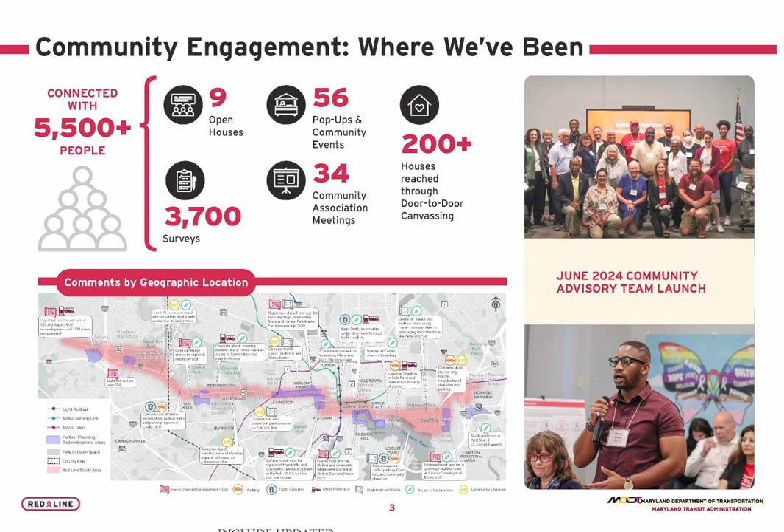The update will revisit and revise the strategies for strengthening communities, supporting economic empowerment, fostering a healthy environment, and managing construction impacts. In addition to updating the Community Compact, the Red Line team will continue using multiple ways to reach communities along the Red Line corridor. Pop-up events will be used to meet people where they are in their daily travels.

Community events, fairs, and festivals will be a way to reach large groups of people from the broader community. Community association meetings will be valuable ways to answer community-specific questions. Online resources like the website, project electronic newsletter, and social media will continue to provide up-to-date and on-demand information and a place to find background resources and materials.

To reach Spanish-speaking community members, engagement activities will continue to be supported by Spanish-speaking team members, multilingual website options, and translated project materials. Light rail transit recommended for the Baltimore Red Line. A key step in moving the Red Line project forward was Governor Moore's announcement of the recommended mode in June 2024. The recommendation of light rail transit for the Red Line was based on 9 measures of effectiveness and community and stakeholder input.

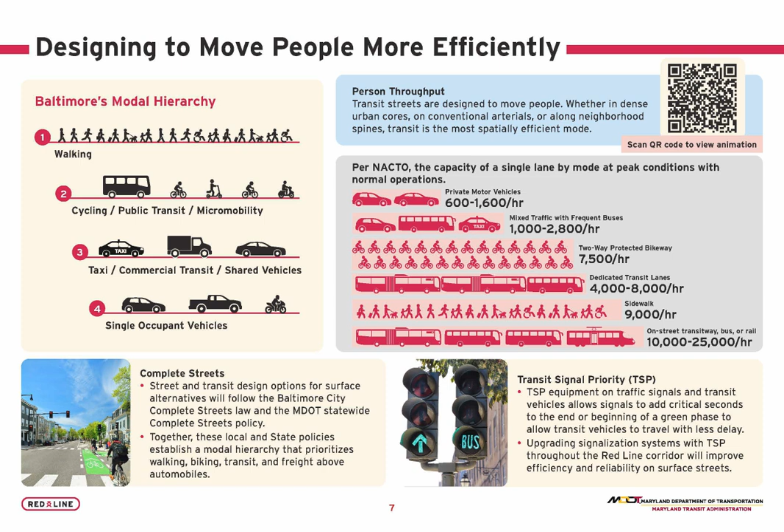Alternatives under consideration. 3 alternative alignments are under consideration, including Alternative 1, which has tunnel segments, and Alternatives 2A and 2B, which do not include tunnels. All 3 alternatives travel between the Center for Medicare and Medicaid Services, or CMS, in the west, and the Johns Hopkins Bayview Hospital in the east.

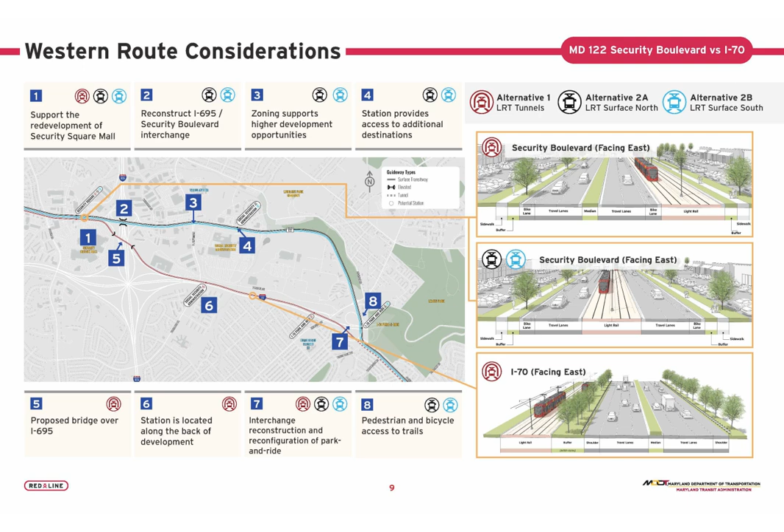Tunnel versus surface considerations on Cooks Lane from I-70 to US 40. Along Cooks Lane, between I-70 and US 40, Edmondson Avenue, the Red Line is considering tunnel and surface running LRT options. Alternative 1 proposes a tunnel from within the footprint of the existing I-70 interchange to US 40. The tunnels include twin bores, approximately 1 mile long and 30 to 110 feet deep. This alternative does not make any modifications to Cooks Lane.

Alternatives 2A and 2B propose a surface-running LRT in mixed traffic along Cooks Lane. This alternative proposes that the LRT operate on the same lanes as general traffic and remove parking on the east side of the street. The map shows the alignments for the three alternatives and the types of guideways, surface, elevated, or tunnel, being considered. The map also includes callouts describing the alternatives and illustrative typical sections along the different alignments.

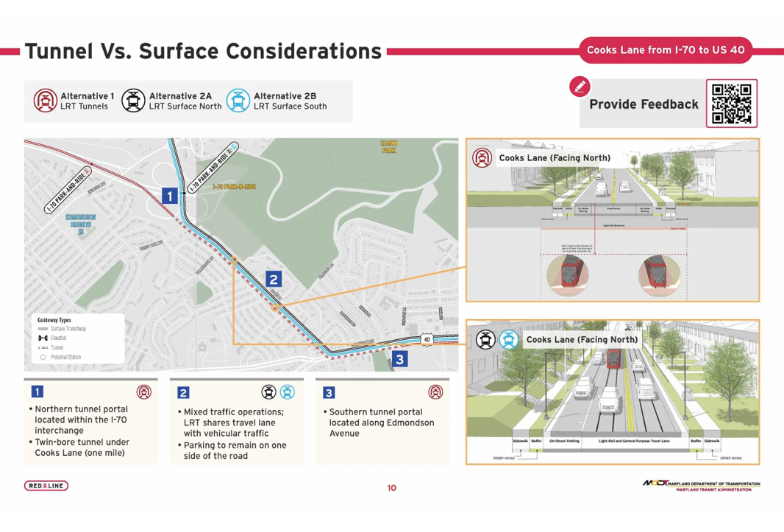Cooks Lane tunnel versus surface considerations. One consideration when comparing the option to use a tunnel to the option to run LRT on the surface is the impact on available street parking. The proposed surface alternatives include removing the parking on the east side of Cooks Lane and maintaining the parking on the west side, which has 125 spaces. According to parking surveys covering both sides of Cooks Lane on weekdays and weekends at different times of day, there were a maximum of 7 parked vehicles on Cooks Lane.

Another consideration is upgrading the existing infrastructure provided by surface alternatives. As detailed on the right side of the display board, this includes roadway resurfacing, streetlights, traffic signals, signage, bicycle and pedestrian facilities like crosswalks, and improved ADA accessibility. A third consideration is the total cost of designing and building the tunnel or surface alternatives. The total cost for the Cooks Lane tunnel is estimated at $540 million, and the total cost for the Cooks Lane surface segment included in alternatives 2A or 2B is $120 million.

The final consideration listed on the display board is the travel time for the Red Line in this segment. Using a tunnel along Cook's Lane is estimated to save 1.5 minutes of travel time per trip compared to the surface alternatives.

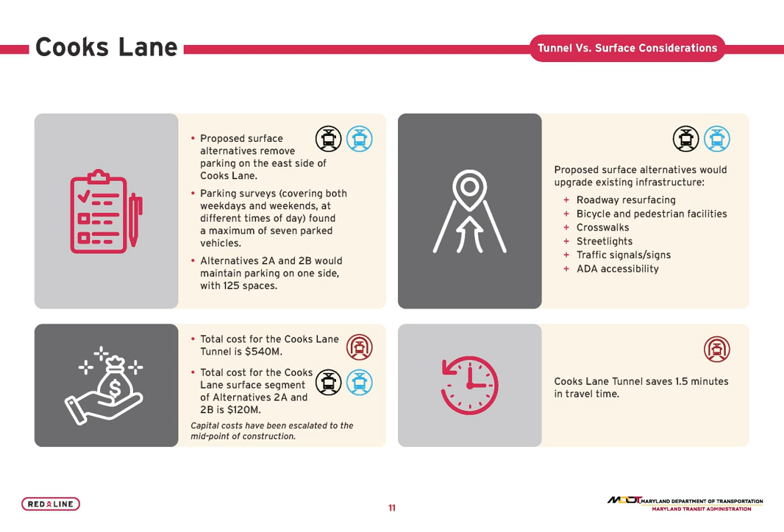US 40 alignment from Cook's Lane to West Baltimore MARC. All three alternatives propose a median running LRT along US 40 between Cook's Lane and the West Baltimore MARC station. The LRT repurposes the existing raised median and one travel lane in each direction along US 40 and maintains 2 travel lanes per direction, plus on-street parking at select locations.

All alternatives include an operations and maintenance facility along the south side of Franklin and a transfer station at the West Baltimore MARC station. The map shows the alignments for the three alternatives and the types of guideways, surface, elevated, or tunnel, being considered. The map includes callouts describing the alternatives and an illustrative typical section along the alignment.

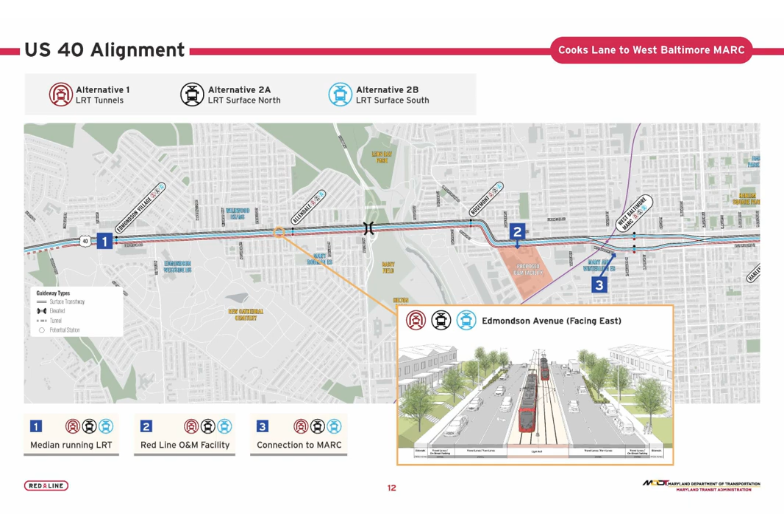US 40 options from West Baltimore MARC to Fremont Avenue. A range of options are being evaluated along the freeway section of US 40. 3 alignment options exist between the West Baltimore MARC Station and Martin Luther King Jr. Boulevard. The first option proposes single tracks along Franklin Street and Mulberry Street to operate as a couplet on either side of the freeway. Station platforms would be placed on either side of the freeway and will require considerable walking distance between the opposing directions.

This option is incompatible with Alternative 1 LRT tunnels and requires structures over US 40 to connect the LRT from Franklin Street to MLK Boulevard. This option also results in 10 at-grade intersections with the LRT, increasing travel time, reducing reliability, and requiring gates, bells, and flashing lights at these crossings.

The second option proposes both tracks along Franklin Street. Like the first option, this is incompatible with Alternative 1, but requires 2 additional structures over US 40 to connect eastbound US 40 to Franklin Street and Franklin Street to MLK Jr. Boulevard. This option also results in 10 at-grade intersections with the LRT, increasing travel time, reducing reliability, and requiring gates, bells, and flashing lights at these crossings.

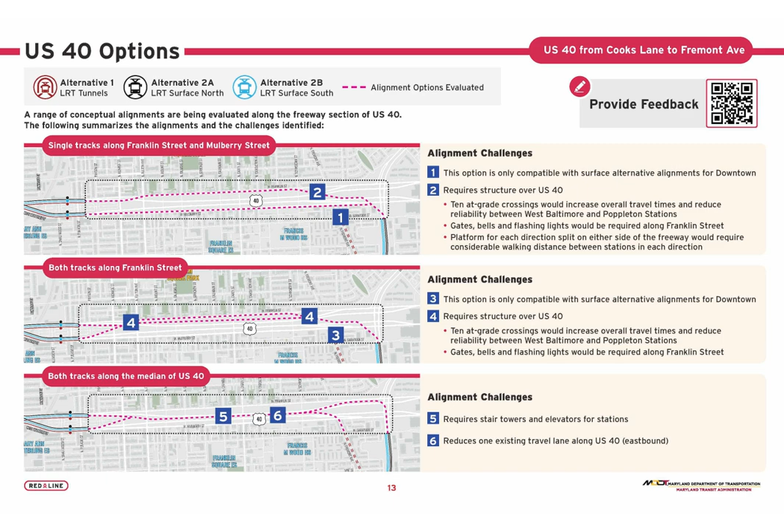The third option proposes both tracks along the median of US 40. This option requires stair towers and elevators to access the station. It repurposes an existing eastbound travel lane of US 40 along the freeway section and is compatible with all 3 alternatives. The map shows the alignments for all three alternatives and the different options being considered. They also include callouts identifying challenges for the previous options.

Route and tunnel versus surface considerations in downtown. Within the downtown area, the three build alternatives propose different routes and surface and tunnel options. Between US 40 and President Street, Alternative 1 proposes a tunnel following Fremont Avenue and Lombard Street. The proposed tunnel comprises approximately 3.2-mile-long twin bores, including portions under Fleet Street and Boston Street, explained on the next board. The tunnel's northern portal would be in the median of US 40.

Alternative 2A proposes that the LRT continue along US 40 and turn south onto MLK Jr. Boulevard. Along MLK Jr. Boulevard, the LRT would operate as a bi-directional transitway, running on the west side of the roadway. The LRT would then operate as a couplet along Baltimore Street eastbound and Lombard Street westbound. The existing bus-only or one travel lane will be repurposed along Baltimore and Lombard Streets to accommodate the proposed LRT.

Alternative 2B proposes that the LRT continue along US 40 and turn south onto MLK Jr. Boulevard. Along MLK Boulevard, the LRT would operate as a bi-directional transitway running on the west side of the roadway. The bi-directional transitway would turn east on Pratt Street and continue east to connect to President Street. The existing bus-only and one travel lane will be repurposed along Pratt Street to accommodate the proposed LRT. This layout is consistent with development opportunities in the Inner Harbor. The map shows the alignments for the three alternatives and the types of guideways, surface, elevated, or tunnel being considered.

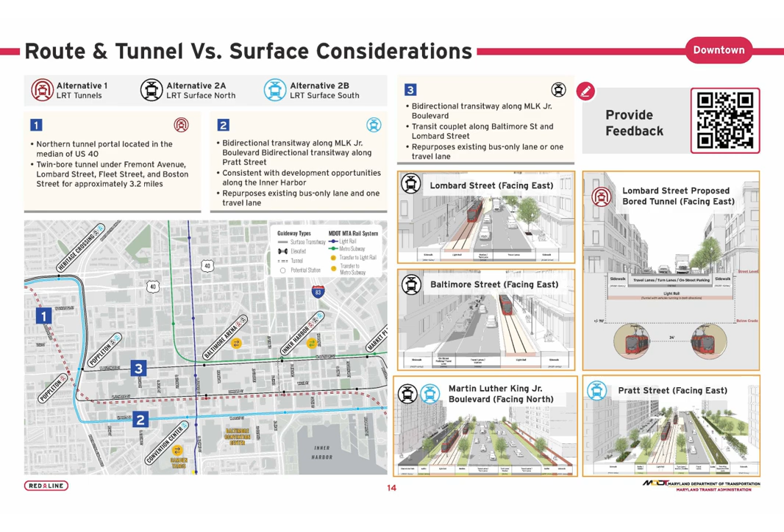The map also includes callouts describing the alternatives and illustrative typical sections along the different alignments. Route and tunnel versus surface considerations in downtown. The build alternatives propose different route, surface, and tunnel options within the downtown area between President Street and the Canton neighborhood. The presented map and alternatives continue the previous board.

Alternative 1 proposes a tunnel downtown from Lombard Street, continuing south parallel on the west side of President Street and then turning east under Fleet Street. The proposed tunnel then turns southeast along Boston Street, with the portal on the median surfacing south of Hudson Street for approximately 3.2 miles.

Alternatives 2A and 2B propose that the LRT be turned south on President Street with a median running LRT. Both alternatives propose that the LRT operate as a transit couplet along Eastern Avenue and Fleet Street, repurposing the existing travel lane and converting these roadways to one-way operations. Eastern Avenue would be one-way westbound, and Fleet Street would be one-way eastbound. On both roadways, the LRT operates on the south side and maintains parking on one side of the road outside station areas.

Alternative 2A continues the transitway couplet along Eastern Avenue and Fleet Street to the railroad right-of-way east of Haven Street in Highlandtown and Greektown. Alternative 2B turns southeast to Boston Street, like Alternative 1, but on the surface, the LRT operates along the roadway's median. The map shows the alignments for the three alternatives and the types of guideways, surface, elevated, or tunnel being considered. The map also includes callouts describing the alternatives and illustrative typical sections along the different alignments.

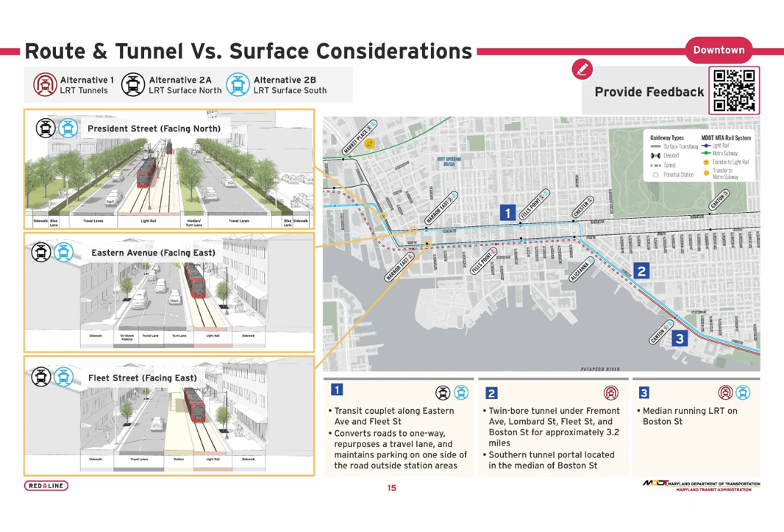A second consideration is the alterations to traffic patterns. To accommodate the surface operation of the Red Line, Alternatives 2A and 2B would alter traffic patterns on Fleet Street and Eastern Avenue. Fleet Street would be converted to an eastbound-only street, and Eastern Avenue would be converted to a westbound-only street. However, these changes only occur on the Fleet and Eastern sections with Red Line operations.

Starting from President Street, Alternative 2A travels on Fleet and Eastern until the railroad right-of-way between Highlandtown and Greektown. However, the alignment for Alternative 2B only travels on Fleet and Eastern between President Street and Chester Street. Alternative 2B does not include alterations to the traffic patterns of Fleet Street and Eastern Avenue east of Chester Street.

A third consideration is repurposing the space used for existing dedicated bus lanes into space used for transitways for the Red Line along the alignments of the surface alternatives. For Alternative 2A, this will impact the existing dedicated bus lanes on Baltimore and Lombard Streets through downtown. Alternative 2B will impact the existing dedicated bus lane on Pratt Street through downtown.

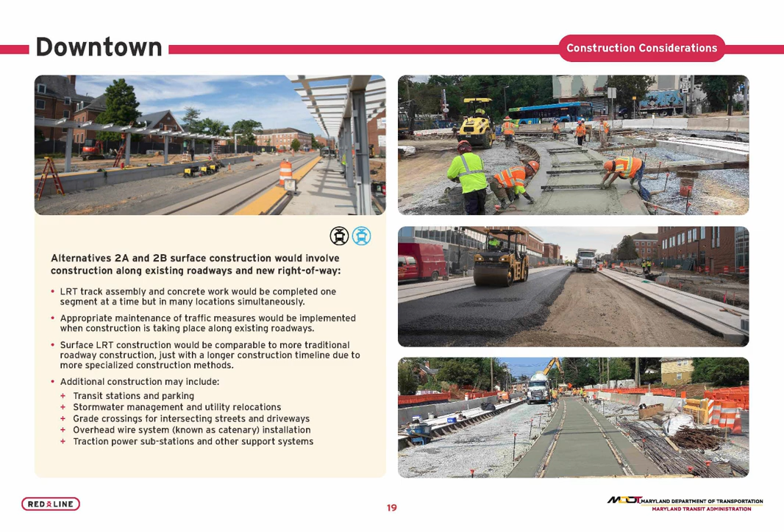Downtown construction considerations. The downtown tunnel construction in Alternative 1 would involve surface alternative construction activities and some elements that add complexity, risk, cost, and time to the project. The tunnel construction will use a tunnel boring machine, or TBM. The portal for launching the TBM will be in the median of US Route 40, and the portal for retrieving the machine will be on Boston Street.

The construction of the tunnel portals will require approximately 2 acres to accommodate both the portal itself and the staging area, and it will require careful management of the noise and dust during construction. Once launched, the TBM would begin excavating from west to east, running 24 hours a day, 5 to 7 days a week. The excavated material would be transported to the western portal area and hauled to another site. Engineering controls would be used to appropriately deal with any contaminated soils.

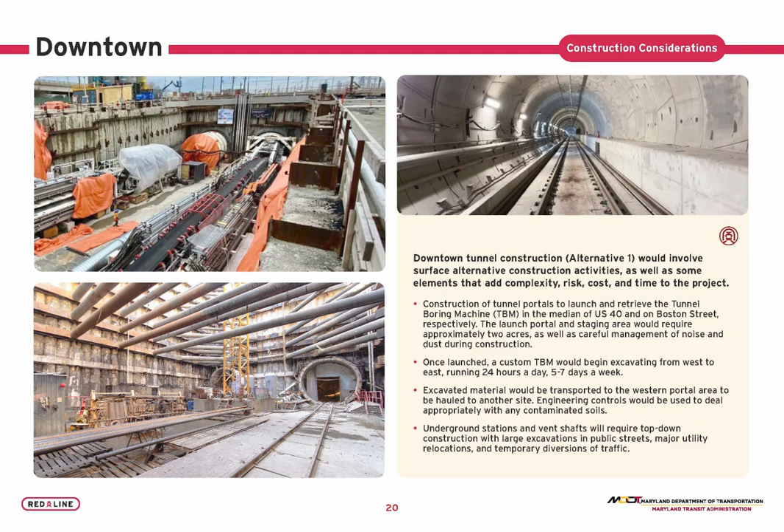The underground stations and vent shafts must be constructed from the top down. This will include extensive excavations in the public streets and the relocation of major underground utilities. Temporary traffic diversions will be used to maintain travel around the excavation sites.

Southeast Baltimore considerations from Canton to Bayview. Various conceptual alignments are being evaluated on the corridor's east end to respond to developments over the past 10 years. The range of alignments covers the area between Canton and Bayview. Significant challenges in this area complicate a direct connection between the Red Line and the Johns Hopkins Bayview campus. Alternative 1 and Alternative 2B propose the LRT along the median of Boston Street before reaching the area still under investigation.

Alternative 2A approaches the area under investigation along Eastern Avenue and Fleet Street, operating as a transit couplet. These alternatives must continue east to connect to the Bayview campus and the future MARC station. This area has established neighborhoods and experienced significant residential and commercial development growth following the previous Red Line alignment. Development growth continues within vacant parcels, reducing alignment options without more significant impacts.

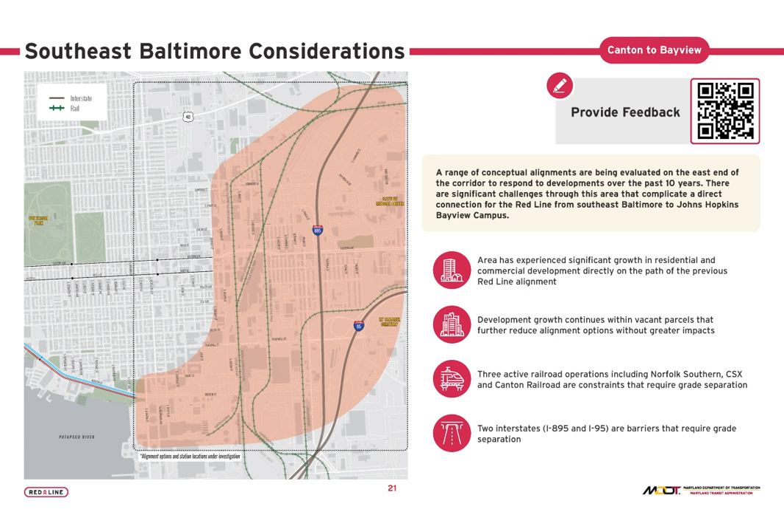Other physical constraints make it difficult to accommodate an LRT system, including the 3 active railroad operations, Norfolk Southern, CSX, and Canton Railroad, and 2 interstates, I-895 and I-95. These crossings require grade separation, and existing structures do not meet design requirements, vertical clearance, load capacity, and width, to accommodate an LRT without major rehabilitation or reconstruction. The map shows the alignments for the 3 alternatives approaching the eastern end of the Red Line alignment. The map identifies areas where alignment options and station locations are under investigation.

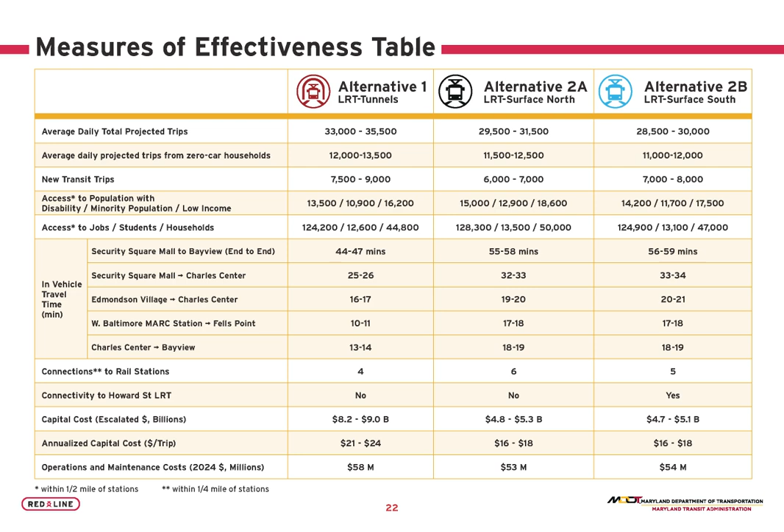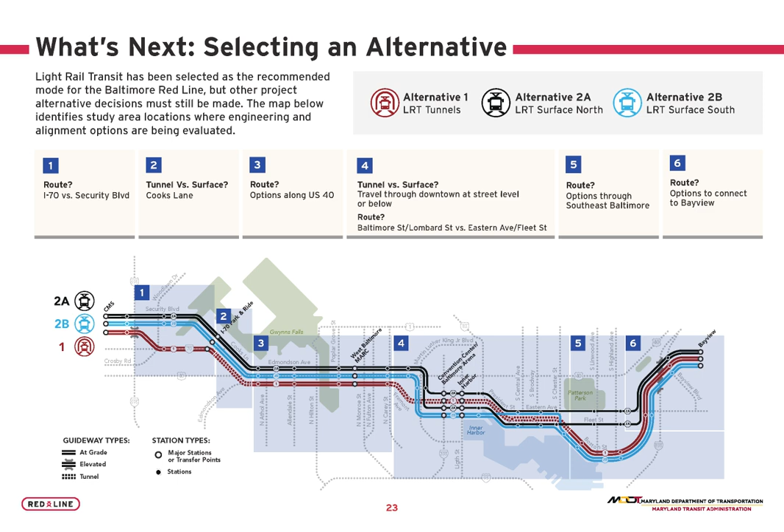Measures of Effectiveness Table. The table shows the different measures of effectiveness for each of the 3 alternatives. For many measures, the value of each alternative includes an estimated range. What's next? Selecting an alternative. While LRT has been selected as the recommended mode for the Red Line, other project alternative decisions must still be made. The map graphic on the display board identifies 6 study area locations where engineering and alignment options are being evaluated. These options relate to the Red Line's route and the decision between tunneling and traveling on the surface.

The National Environmental Policy Act process. In 1969, Congress passed the National Environmental Policy Act, or NEPA. The purpose of NEPA is to ensure that the federal government considers the potential impacts of its actions on the human environment. This is accomplished by requiring federal agencies to identify and address potential disproportionate and adverse effects of their actions on disadvantaged, minority, and low-income communities. As a recipient of federal funding, the MTA must satisfy these requirements for the Red Line project.

The second step of the process is to collect data analyzing existing conditions in the project area, identify studies needed to obtain more information, and begin preparing the supplemental environmental impact statement. The MTA is currently in the Analyze Alternatives step, during which the purpose and need are used to screen alternatives, and the environmental impacts of the other options are analyzed. The next step is to publish the environmental document for public comment. The document will identify the preferred alternative, and the public hearings will be held to accept comments.